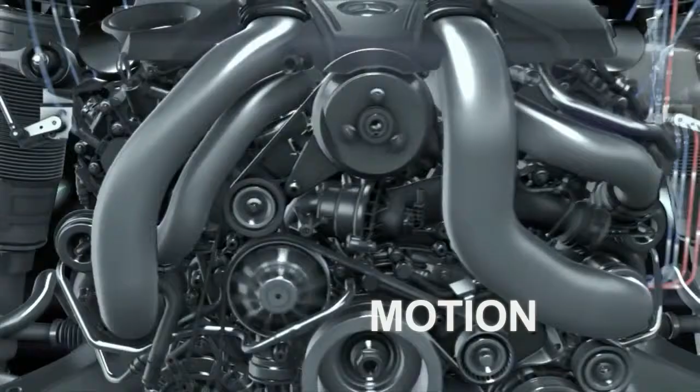Life is motion. Motion is impossible without friction. How can we solve the problems caused by friction? That is the question.

Kragelskiy Institute of Tribology presents the most effective and, at this moment, the most universal toolkit for solving the tribological problems of technical progress. New automated complex of tribological researches ITRIB system.

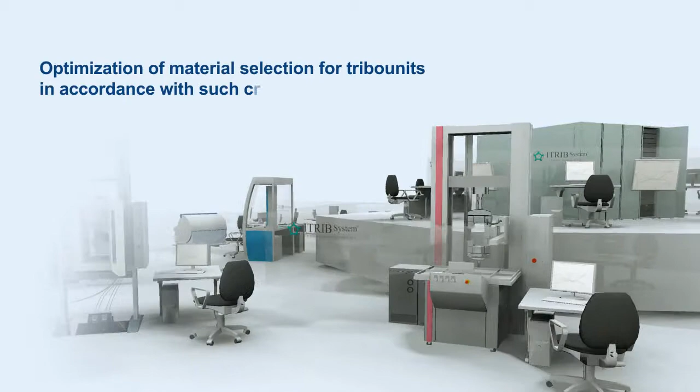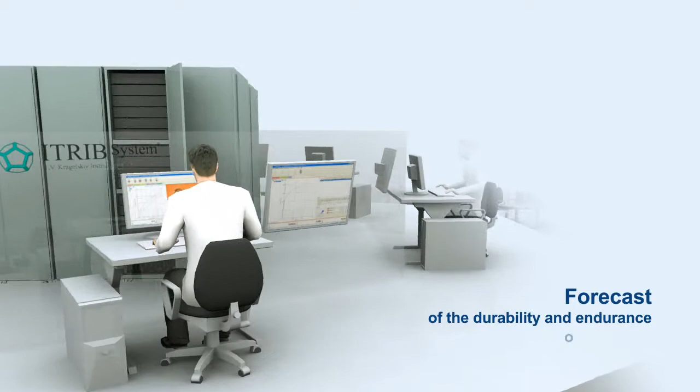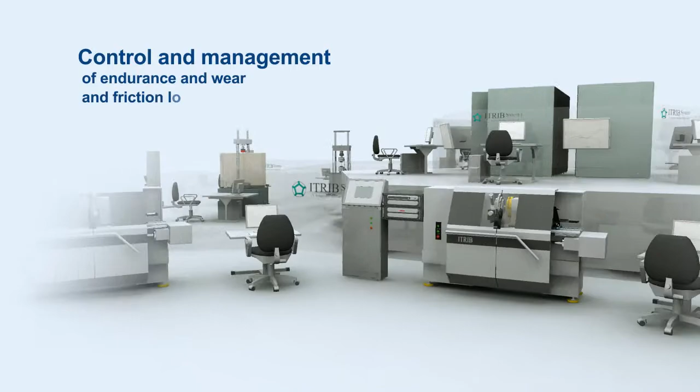ITRIB system makes the following possible: optimization of material selection of tribo units in accordance with such criteria as functional purpose, wear resistance of the tribo unit as a whole and that of its elements, forecast of the durability and endurance of tribo units, forecast of serviceability and reliability of tribo units, control and management of endurance and wear and friction losses in maintenance, creation of new materials and nanocomposite covers of tribological purpose with the set properties value, research of the nature of friction and wear of tribo units materials.

Complex of Tribological Researches ITRIB system is an industrial variant of a new calculation experimental complex of technical tools and software created for forecasting and control of friction and wear of frictional knots in tribo systems and for managing their operational indicators. ITRIB system become an equipment of design and research centers of industrial enterprises, scientific institutions and universities. ITRIB system consists of 5 test modules and the information analytical module.

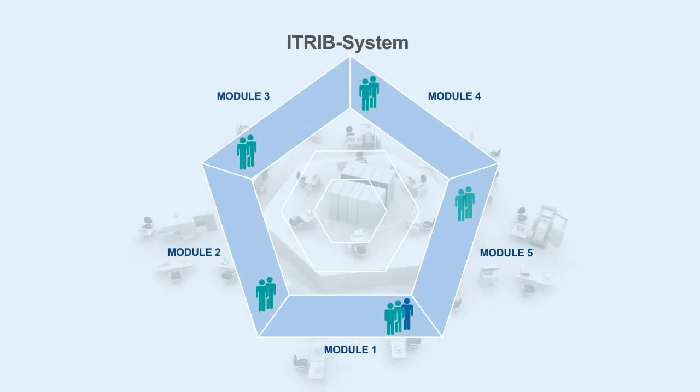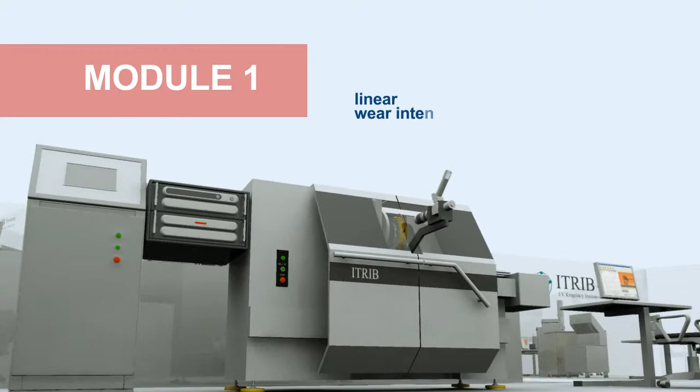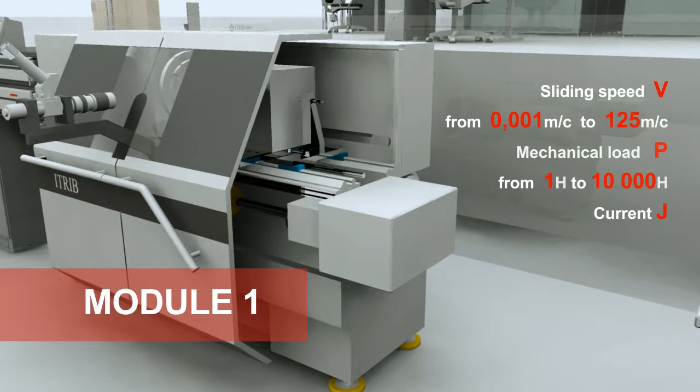Module 1 is focused on tribotechnical tests of friction knots aiming at obtaining different electrical frictional wear properties of friction couples. For example, friction coefficient, contact electrical resistance, linear wear intensity, temperature in a friction zone. In a wide range of electrical frictional interaction modes, it obtains such parameters as sliding speed from 1/1000th to 125 meters per second, mechanical load from 1 to 10,000 Newton, current from 0 to 500 ampere.

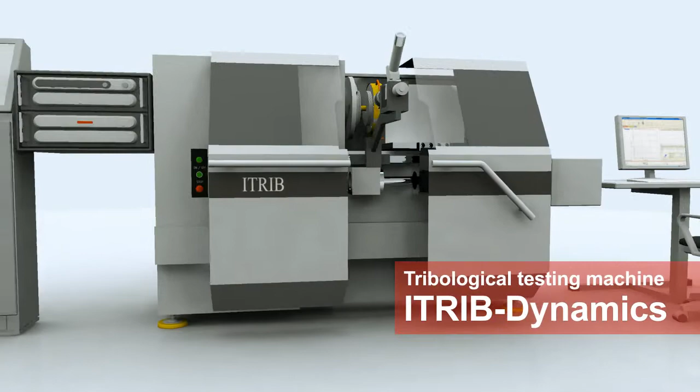Module 1 is equipped with new original tribological testing machines, ITRIB Dynamics, with original methods of testing and software. Tribological testing machine ITRIB Dynamics can also be used separately with other special methods of testing and software.

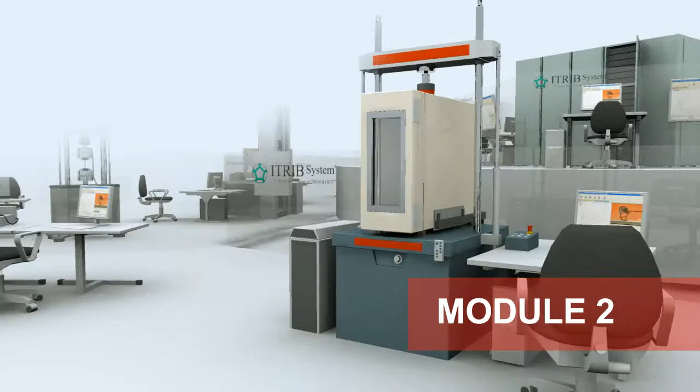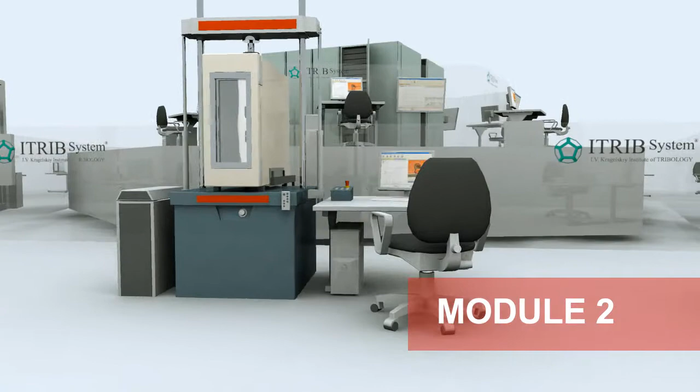Module 2 is focused on testing elastic plastic parameters of materials in function of temperature. For example, Rockwell ball hardness, Brinell hardness, plastic hardness, contact rigidity of tribo junction. It is equipped with new original universal testing machines, ITRIB Contact, with heat chambers, original methods of testing and software.

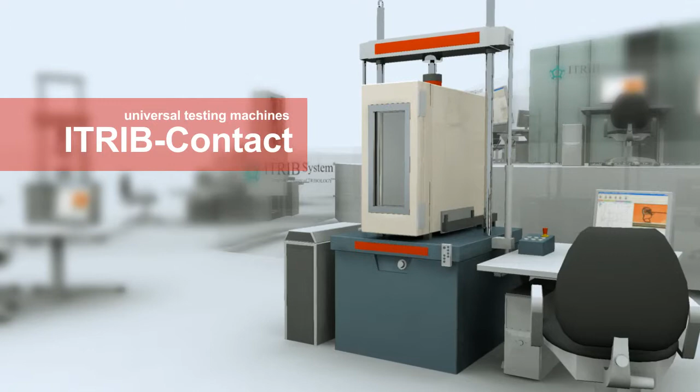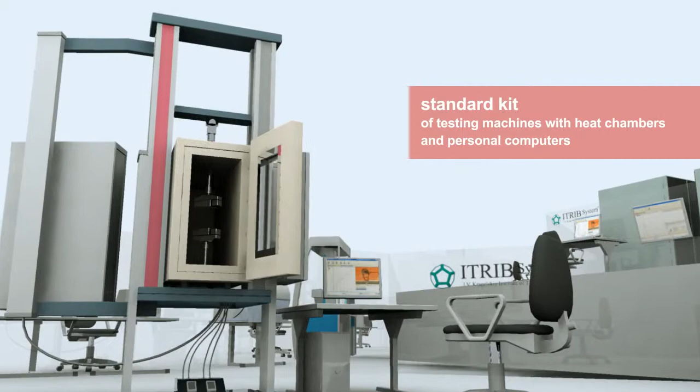Module 3 serves for carrying out tensile and compression tests for ultimate strength, yield strength, to be registered in a function of temperature. It is equipped with standard kit of testing machines with heat chambers and personal computers.

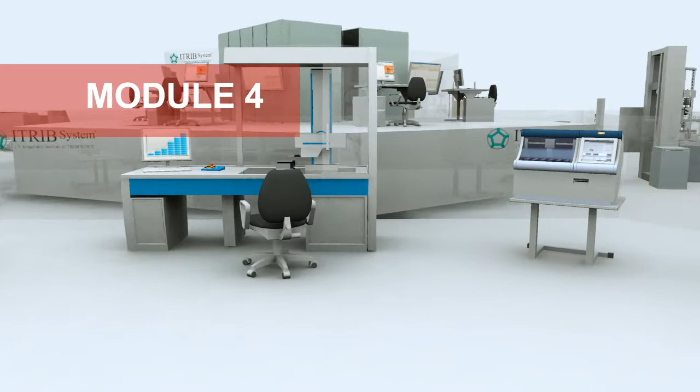Module 4 is equipped with standard machinery with personal computer for researching parameters of roughness of friction surface, electrical physical parameters of materials, with equipment for chemical and structural analysis, with devices for weight control of materials that are being tested.

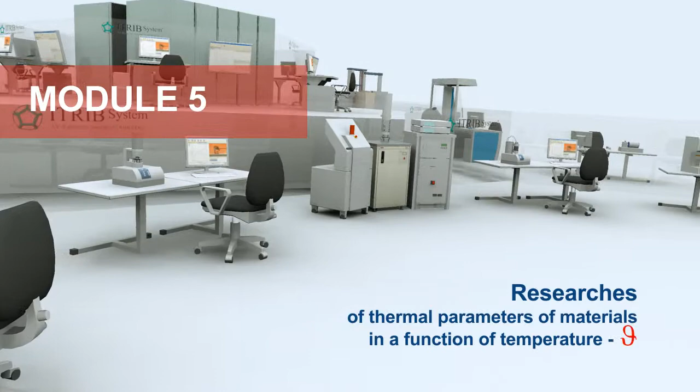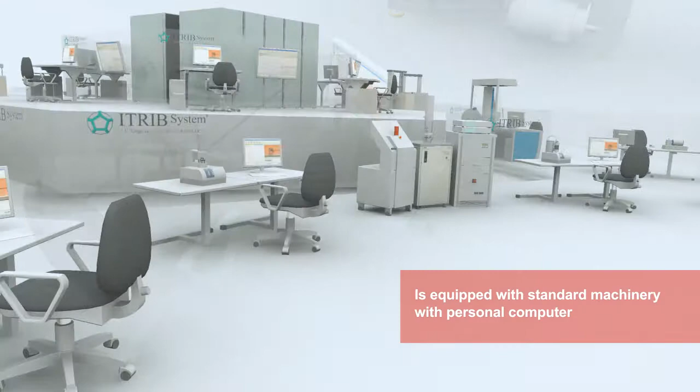Module 5 makes it possible to carry out researches of thermal parameters of materials in a function of temperature. For example, heat conduction, thermal diffusivity, specific heat, density. It is equipped with standard machinery with a personal computer.

Information analytical module is the nucleus of the ITRIB system complex. It is equipped with a supercomputer. The information from all 5 modules comes here. From Module 1 come the data from the tests of tribo units materials on electrical frictional heat resistance of protracted cycle, including its subcases like friction heat resistance, in order to obtain the tribo unit's electrical friction wear characteristics.

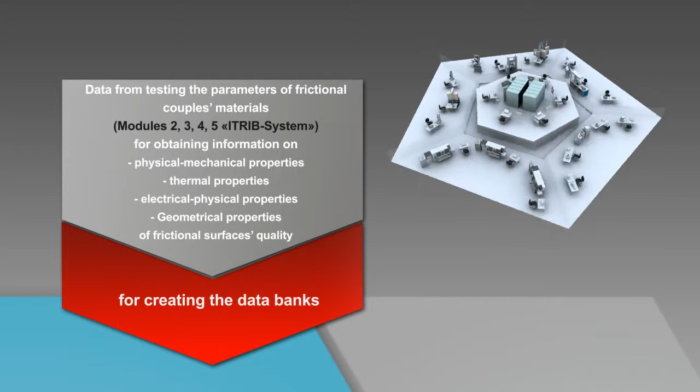Data from testing the parameters of frictional couples materials come from other modules for obtaining information on physical-mechanical properties, thermal properties, electrical physical properties, geometrical properties of frictional surfaces quality. Software processes the information of lab testing from modules 1 to 5, creates data banks of materials properties and libraries of electronic tribotechnical information for analytical forecasting of tribotechnical properties of machines' frictional knots on basis of generalized thermodynamics of friction and wear of tribosystems.

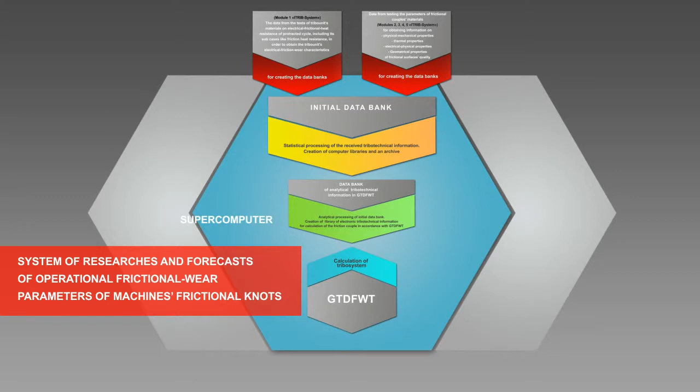Software of the Information Analytical Module is elaborated as a system of researches and forecasts of operational frictional wear parameters of machines' frictional knots. Functional capabilities of the system provide for parallel researches in 6 directions in the mode of dialogue between a person and software of the ITRIB system.

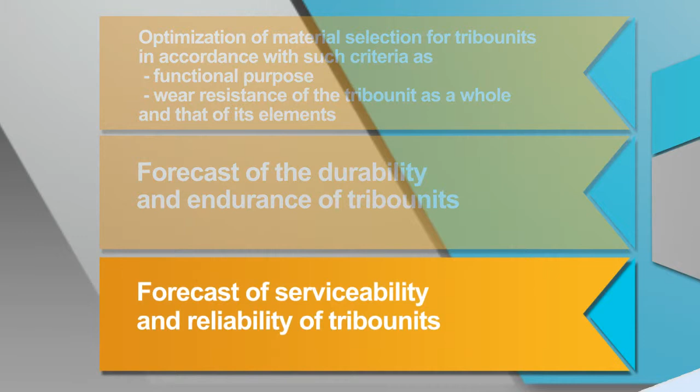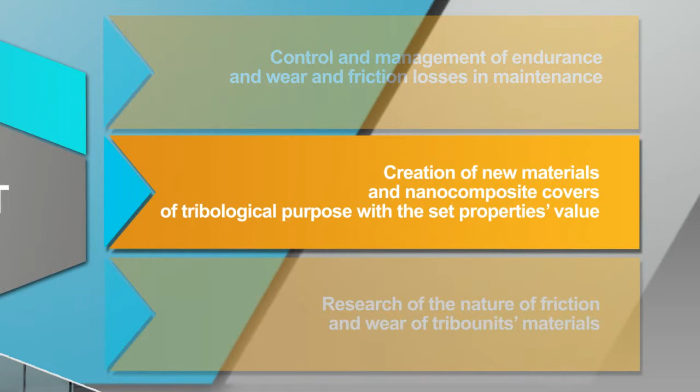Optimization of material selection of tribo units in accordance with such criteria as functional purpose, wear resistance of the tribo unit as a whole and that of its elements, forecast of the durability and endurance of tribo units, forecast of serviceability and reliability of tribo units, control and management of endurance and wear and friction losses in maintenance, creation of new materials and nanocomposite covers of tribological purpose with the set properties value. Research of the nature of friction and wear of tribo units materials.

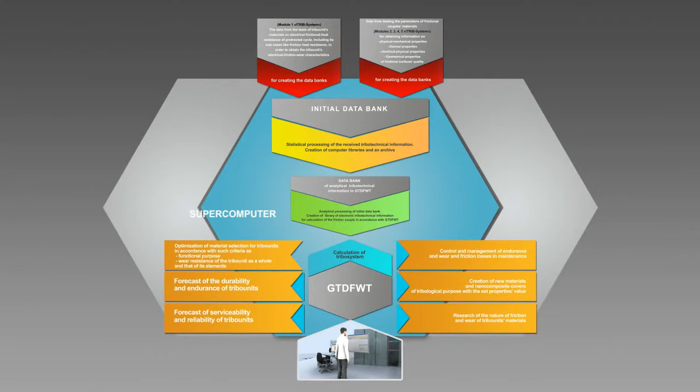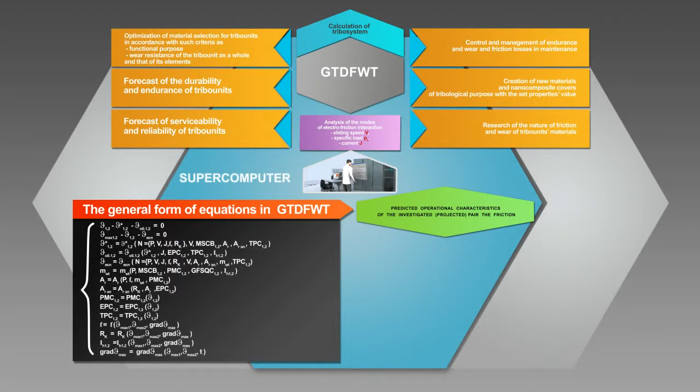Algorithm of calculation of electro-friction interaction in accordance with generalized thermodynamics of friction and wear of tribosystems in the software of ITRIB system makes it possible, on basis of the solution of the generalized thermodynamics of friction and wear of tribosystems set of equations, to obtain in general the following information about operational parameters of a considered friction couple of a real frictional knot for any moment of its work, that is, as function of friction time.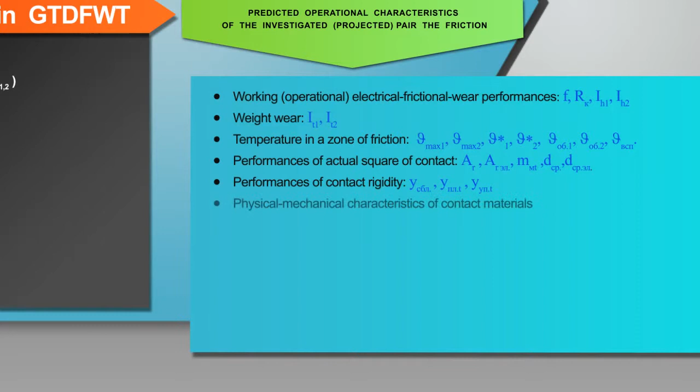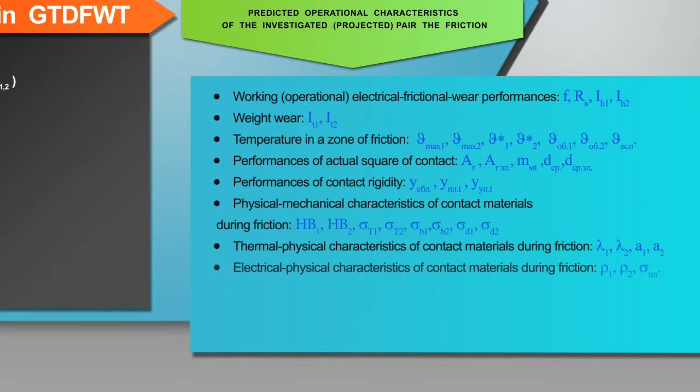Working, operational, electrical frictional wear performances. Weight wear. Temperature in a zone of friction, performances of actual square of contact, performances of contact rigidity, physical-mechanical characteristics of contact materials during friction, thermal physical characteristics of contact materials during friction, electrical physical characteristics of contact materials during friction.

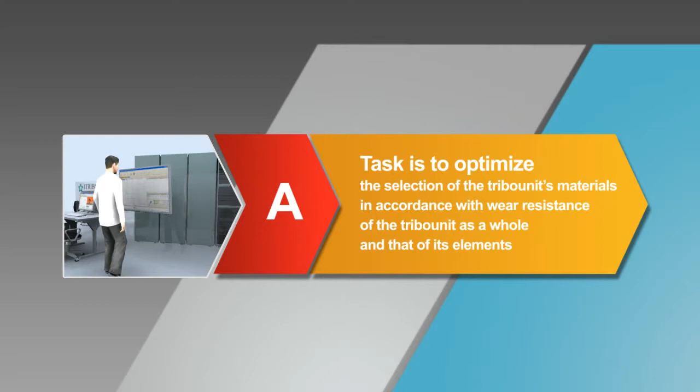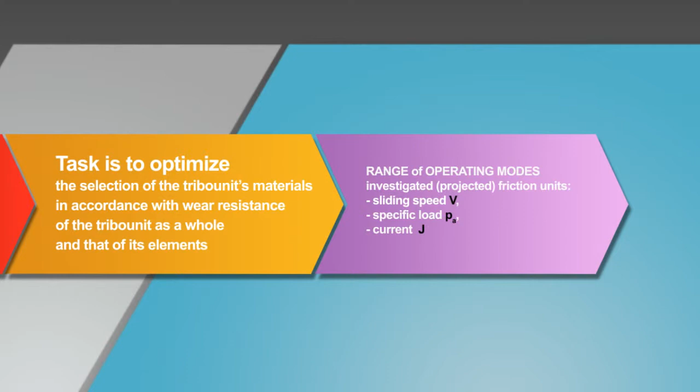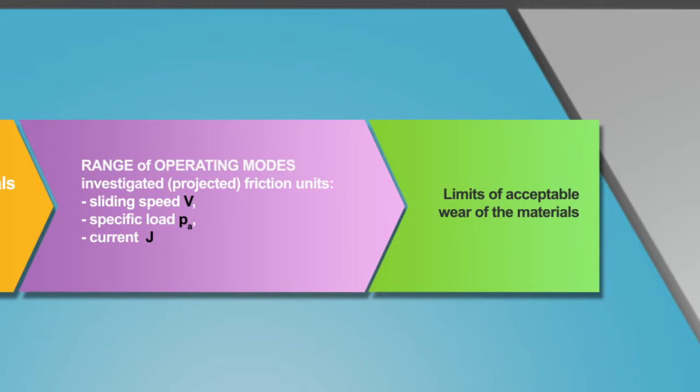Of the new automated complex of tribological researches ITRIB system at a point A of supercomputer software, a researcher sets one from 6 directions of researches. For example, at point A, the task is to optimize the selection of tribounit's materials in accordance with wear resistance of the tribo unit as a whole and that of its elements. The researcher enters the parameters of working mode of the considered drafted tribo unit, such as sliding speed, specific load, current if for electrical contacts, limits of acceptable wear of the materials, and commands the computer to activate the program.

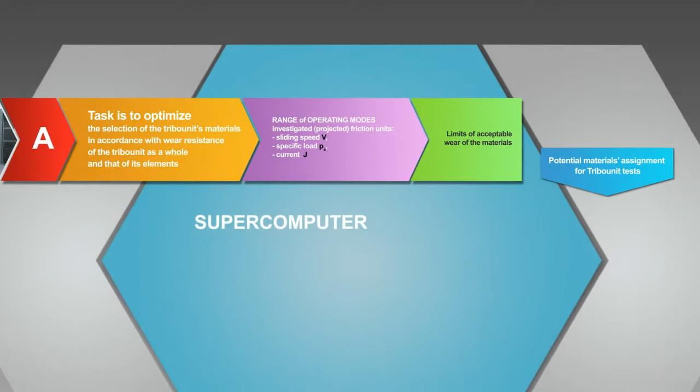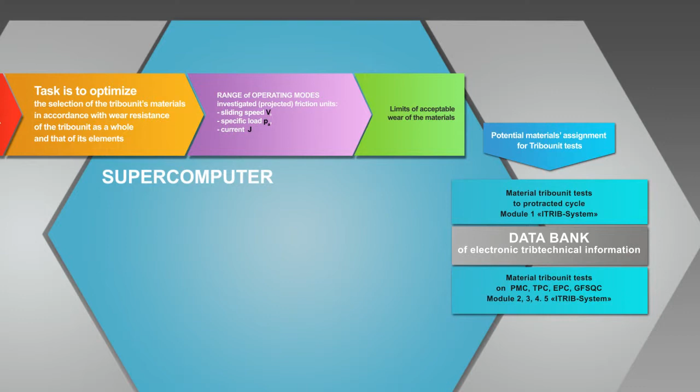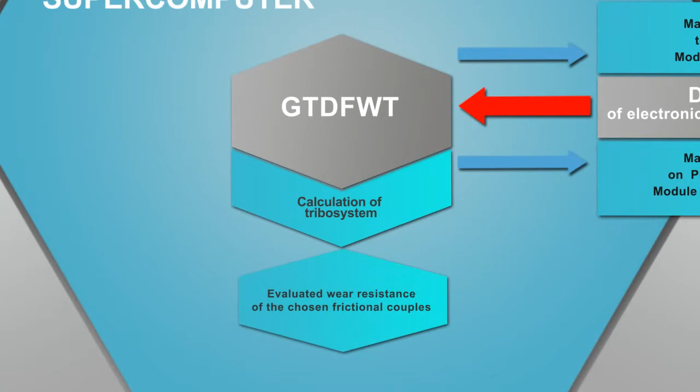Further work is carried out by the computer with its software. It analyzes the library of electronic tribotechnical information. Sets the task for testing modules for additional researches in case there is no necessary data in the library. Calculates in accordance with generalized thermodynamics of friction and wear of tribosystems. Evaluates wear resistance of the chosen frictional couples.

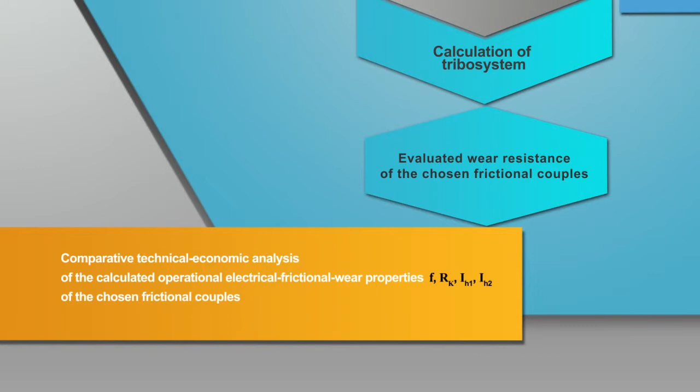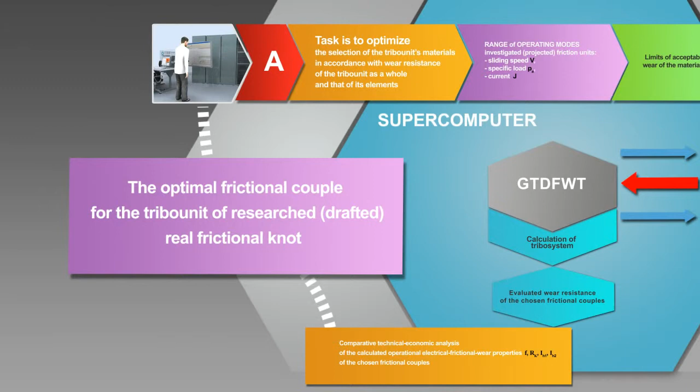Carries out comparative technical economic analysis of the calculated operational electrical frictional wear properties of the chosen frictional couples. Offers the researcher the optimal frictional couple for the tribo unit of researched, drafted, real frictional knot. Or offers the researcher the modes of task correction in case the solution is not found.

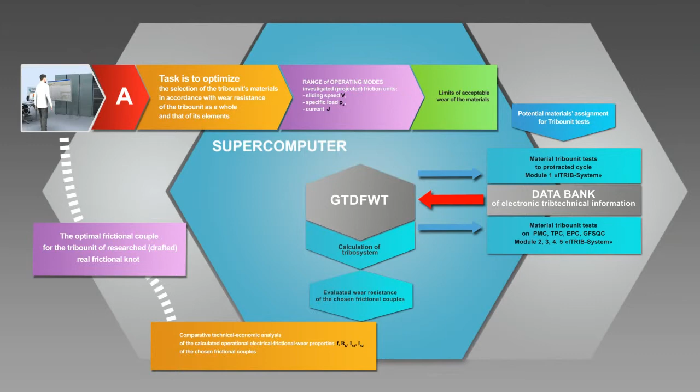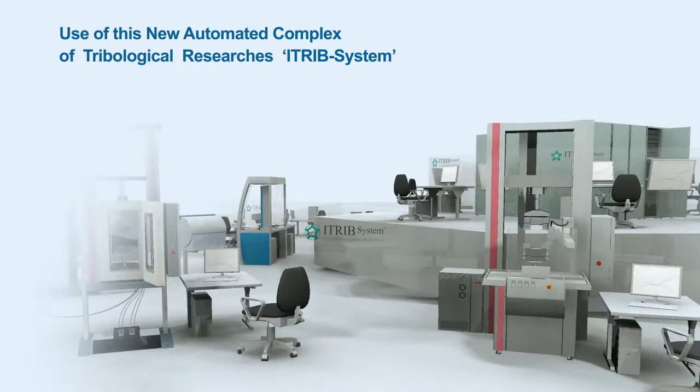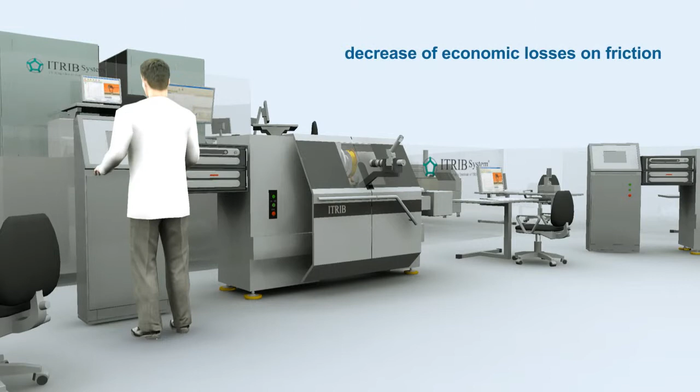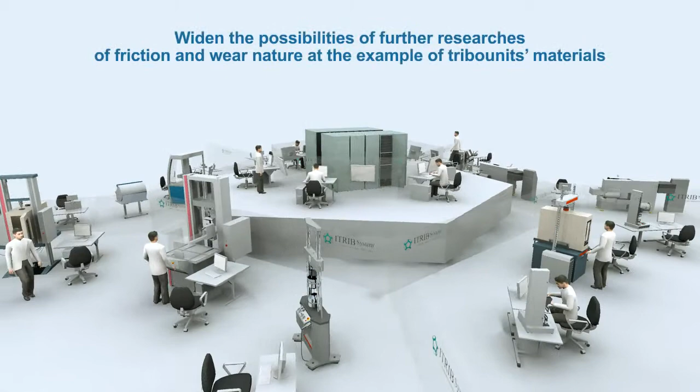Use of this new automated complex of tribological researches ITRIB system will provide industrial enterprises, scientific institutions and universities with an effective industrial automated system of machines work optimization, decrease of economic losses on friction. It will increase the reliability of devices and mechanisms from the point of tribology, widen the possibilities of further researches of friction and wear nature at the example of tribo units materials.